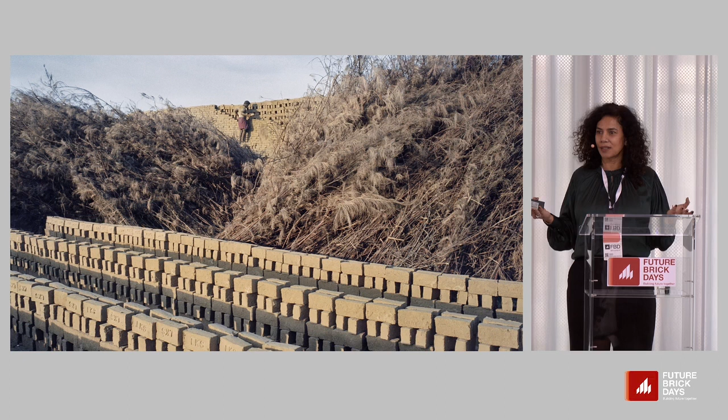So the outer bricks are less cooked, and they are used in the interior of the walls. Instead of getting the entire brick to reach a certain standard of firing, which we have now in post-industrial systems, I feel that over-standardization is probably giving us an environmental problem. I sometimes think about it, because we use a very high-quality thing for everything, which could also be done with a lower quality.

So the lower quality brick, I understood after I started traveling in rural areas in India, is not because they made it badly. It's just that the local clay and the local fuel can only go that far. But it's enough, and it's waterproof. And the kiln, which is composed like that, as a brick stack, is then plastered with the same clay mortar and then fired.

Also, the fuel used is from the thinnings of plantations that they have themselves planted, which we also use for scaffolding, these very quick growing casuarina. But anyway, what I started noticing in the sustainability discussion is that all material sourcing is a socio-economic activity. These people probably fire lime at the same time; there are lime kilns, people making all these materials from what they have around them. But they're also farmers, doing so many other activities, not just an 8-hour job somewhere.

So all the costs, everything collapses if you stop using one local brick. All the other activities get affected. So through that understanding, when I began my early projects, I started favoring locally made bricks, because I found that in South India they were still making bricks of that proportion, 2.5 centimeters high, using lime mortar. I felt you don't have to design what is still functioning. Just design around it and continue what still works.

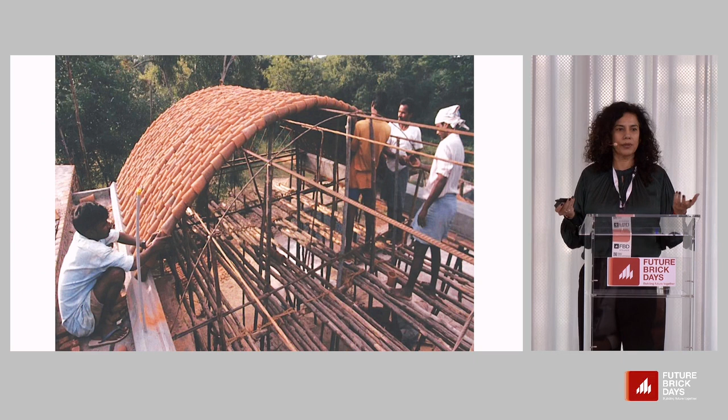If you just see what is around you with new eyes and create materials that would do the place good. And if there's a lot of labor, if there are pottery skills, what you have in abundance, if you build with that, it's going to give a very economic formula. So through this approach, I started my practice at 23, immediately after graduating. And that was the first building for which I had done this kind of roof.

I came, like I said, from Bombay to an area like this. And I felt that if you just repeat the concrete slabs, you would first create a heating problem, then you'll have to cool it with air conditioning. So I was looking for an alternative roofing system, and that's how the journey began. The brick walls came later. So this is an example of that house, where I'm also using lime mortar, stabilized with 10% of cement so that it sets quickly and matches the pace of today's construction.

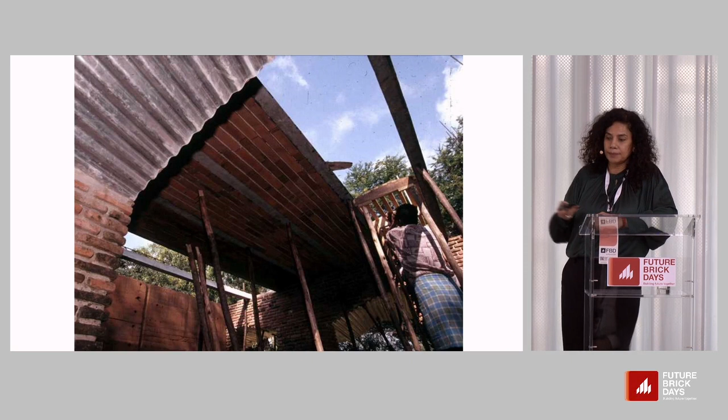But then I went on to produce other roofing systems as the research went along. This is, for example, a jack arch type of system that you can use between prefabricated beams, because you can't use catenary vaults everywhere when you need a ceiling, a floor I mean. And so this is still an insulated final floor that is flat. But then I've also used bricks in a similar way for intermediate floors.

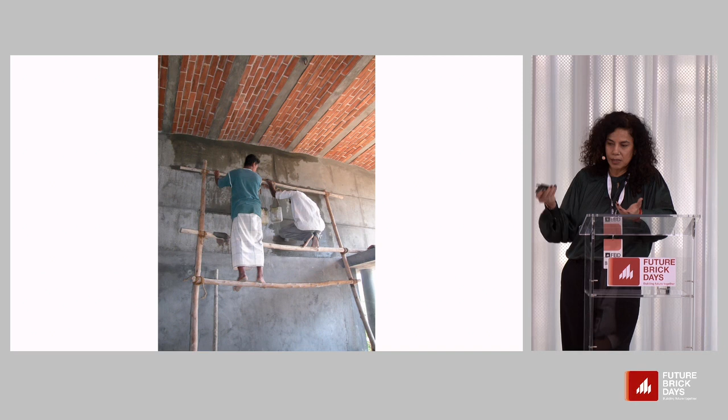While I went along with this, I developed also in that, what I felt is it's an infinity of things you can invent and continue to do. That's why I believe in building the knowledge rather than just building the building. Because if you build knowledge, then you build a community, and with that community you learn, it unfolds into many other expressions. Like here, this is the original ceramic cooking pot that those people there produced, which actually nobody uses anymore on a daily basis, but they still keep producing it for festivals and so on.

I used these materials as a formwork to reduce the steel expenditure in concrete slabs, because a lot of the intelligent concrete applications need complicated formwork, and the formwork becomes expensive. So I made a kind of lost formwork. I know this word in German, verlorene Schalung. I tried so hard to explain that this is not a decorative thing; the idea is that the bigger the span, the more steel you save. Because after a while, concrete has a self-weight problem. So then you can make the whole slab thick, and then you carve out the holes in it.

But then I also started doing brick vaults, and I started using bricks wherever I could initially, because I was in an area where this was the ancient material, and also in places like Berlin, when you see all the main houses, if the plaster breaks, you see there's bricks. So that means that the earth there is good for making bricks out of it.

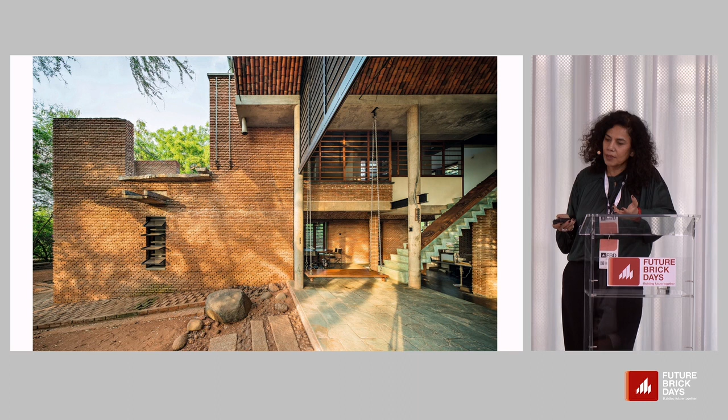Many people feel a brick is just a brick, but I felt that in any material, even in any vernacular technology, there is so much more optimization to be done. We don't have to start with the industrial materials. We can do those, and we can also revisit ancient, timeless materials and probably use them in different ways, or in any case, optimize. So this is the resulting house, which is known as Wall House. It's my own house, actually. That's why I could experiment more.

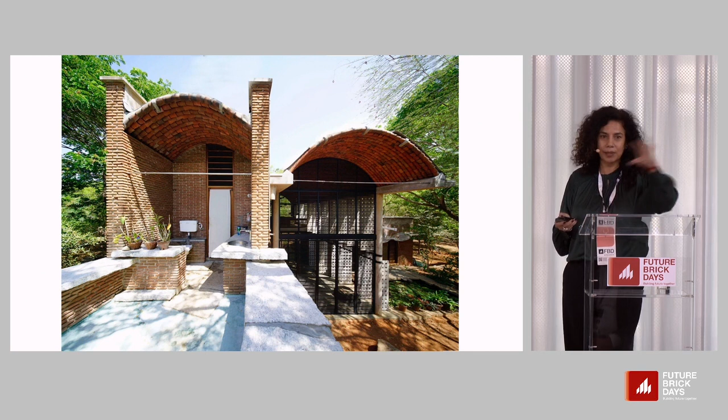I'm focusing on one example where different techniques are there, but you see them piecemeal in many of my projects. And I also used this project to test various ideas so that the clients don't have to feel like they are taking a major risk and being used as guinea pigs. See, the back wall there is rammed earth. When the earth is sandy, I was testing this also for another project. So my house was like a laboratory.

Because I didn't want to make false promises to my clients. I wanted that if they come on board, they should also be willing to take risks, because I don't want to promise some illusion, you know. We have to know where we feel secure and where we are experimenting.

In many of the other low-cost housing projects that I later did, I found that a lot of the techniques I was working on turned out well. My first project was not my own house, it was for a French client who had quite a generous budget. But it turned out in the end that it was also the most affordable one when we did other low-cost housing. So that was a very flattering outcome for me, to see that I couldn't come up with a cheaper roofing system. Even bus sheds have been using them now.

Or this one is a kind of vocational training center for students to learn carpentry, etc. And this system I tested in my house was for this project, which is a co-housing project, so that the roof is like a big insulated umbrella and the intermediate floors don't need insulation. And these elements were extracted on site and produced also on site to some extent.

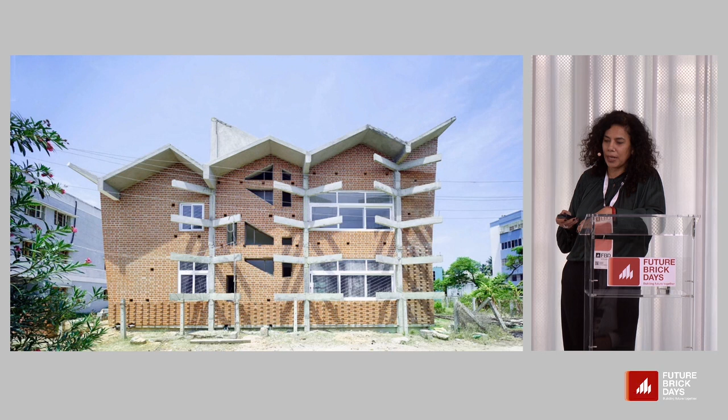And these are very humble budgets, very social buildings. And this is a more recent one, which is a daycare center. In this case, I wanted to make the building look very stable. I wanted to keep it unplastered largely. I wanted it to look like a very stable, solid institutional building, because the children who grow up here come from very difficult backgrounds. And I wanted them to have a sense that we go to a very stable, very solid, permanent building.

And to keep the feeling of the porosity here, even for them, I used the terracotta screens as walls, because this is again a very low budget building, and I preferred to have porous walls and have a very solid roof and a very solid structure, so that they come somewhere and get security.

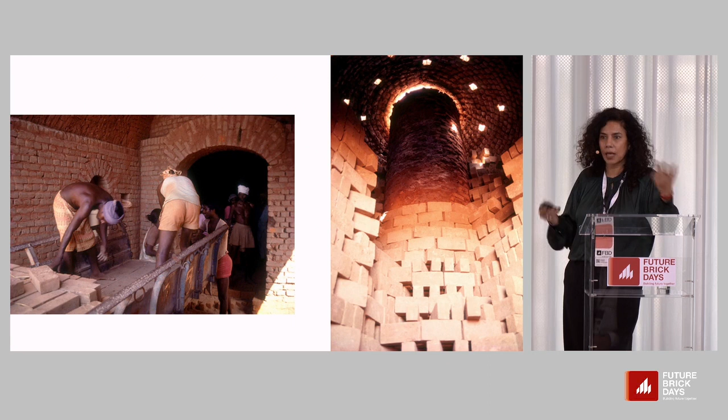It's a very, very complex thing. But for the typical people who make bricks, who know the clay, it's not so hard. It's hard for us in the development phase, and this technology is in its infancy. Because you modularize and produce it on site, but you assemble it with the same clay, you don't need cement. First advantage. Then you get a pattern where the uneven firing is not pixelated. You see it like brush strokes, like how the fire moved, and you can see different colors.

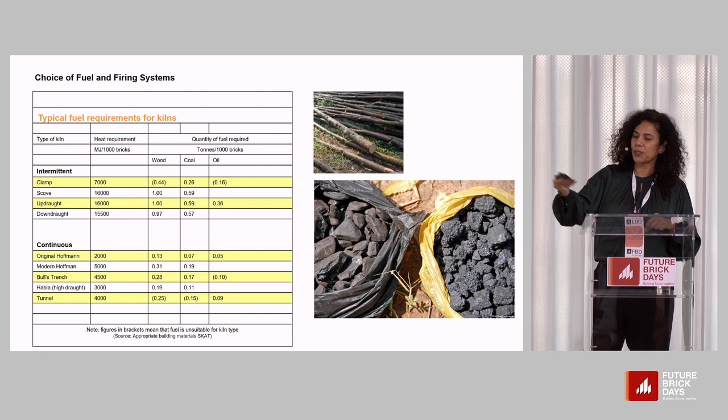But the whole thing is a unified, vitrified product, a large house being produced like a large pot, actually, which is, like I said, theoretically, for the price of a mud house, you're getting the waterproof qualities like a brick house.

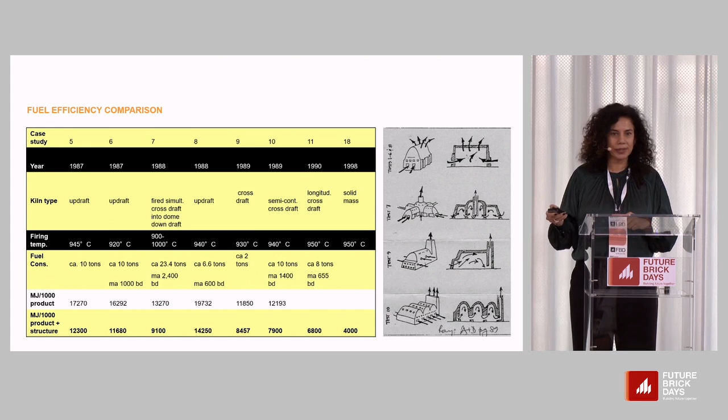And in this system, in my PhD, we had analyzed all types of other kilns and houses: what are the fuel types, what are the types of kilns, and how those kilns could lead to different systems, could lead to different architectures if you were to reuse it, double it up. So this is one of the houses I have designed and built according to those principles.

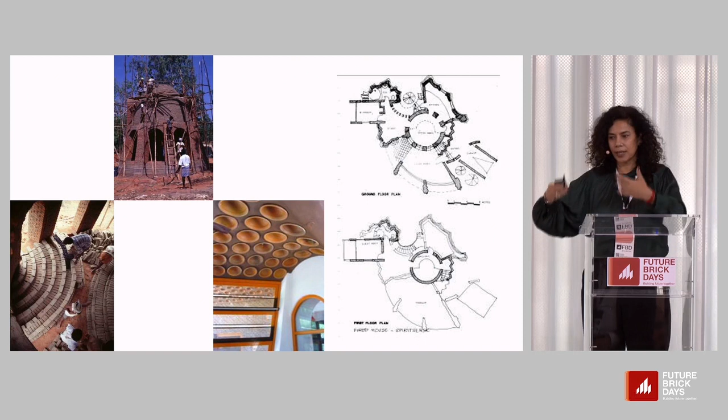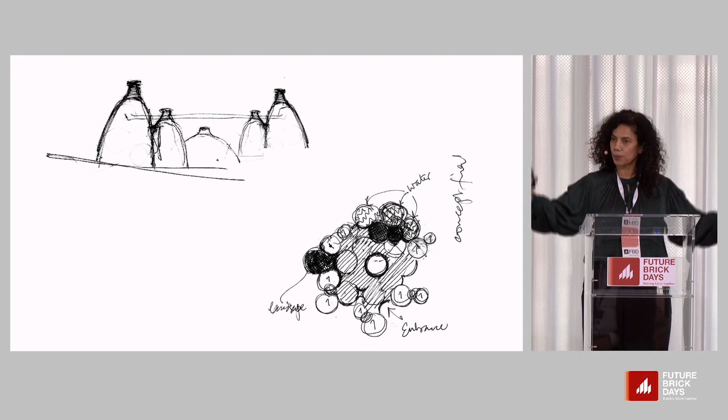But by the end of doing this house, I realized that it's the walls that have to be very thick, and then there's trouble firing the thickness of the wall. So when I analyzed all these structures and did the PhD, by the end of it I thought the best is not to have walls and to do the whole thing like shells. And catenary curves tend to become quite vertical at the base. So instead of having a thick wall like that, just a thin 15 centimeter or 10 is enough.

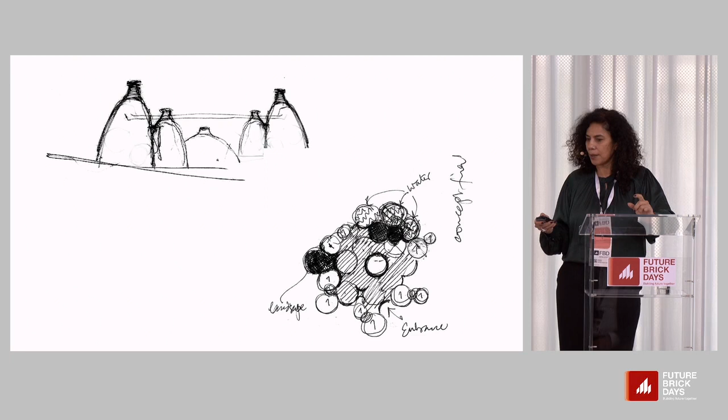So I produced homes for homeless children, which had no budget anyhow, and they were cozy spaces, so I composed all of this on that principle, and I think we might have got quite a high fuel efficiency here, since the whole structure could easily fire through. We used these bicycle wheels, etc., to do the formwork, because we didn't have a budget and we were trying to save wherever we could and reuse other things, even in the process.

One of the interesting things we did here also, I have to mention, is that instead of using wood or coal to fire this building, we took coal dust, which is a product that you can get from all the kilns and all the industries. You can sweep the floors, collect the dust. There is some calorific value left. So Ray Meeker analyzed that if you added 5% of this to the clay and put it in the firing, then by the time the fuel is spent, it is burnt, so the next layers catch fire. Very complicated, sorry if I'm going too much in detail.

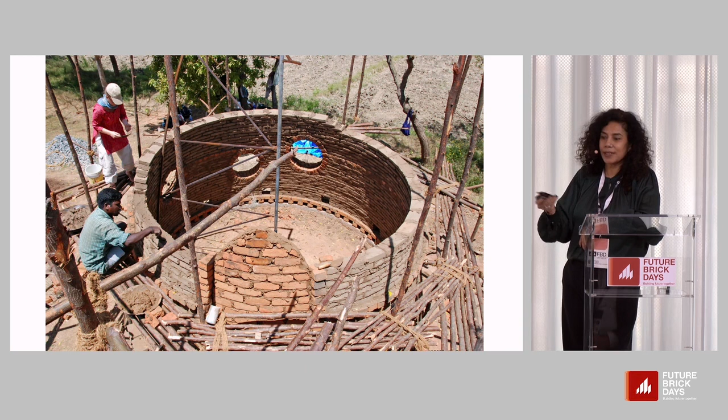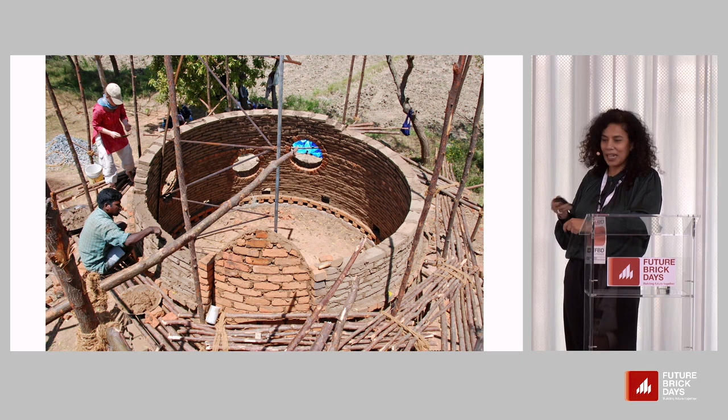But basically, it's another technique because there's also reuse of fuel, and for the efficiency of this, I think we were trying to target being much less. I was telling Ray, it doesn't matter, if you're already saving the waste heat of the other brick kilns, it's already performing well. And he was saying, no, there's no sense in taking all the trouble if you're not radically efficient with the energy, and many layers of rethinking.

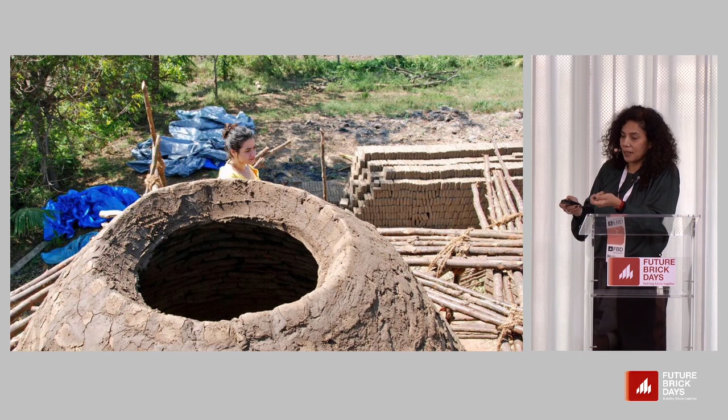So it looks like a humble vernacular project, but I want to show you, see down there, it's full of rethinking. Down there, you see the oxygen has to come in here for combustion, and the other holes are to just start the fire. And then this is how the dome ends, the firebox, as I just explained. Then you have to stack the first layer like you would do a barbecue grill. You have to allow the air to come in from the bottom.

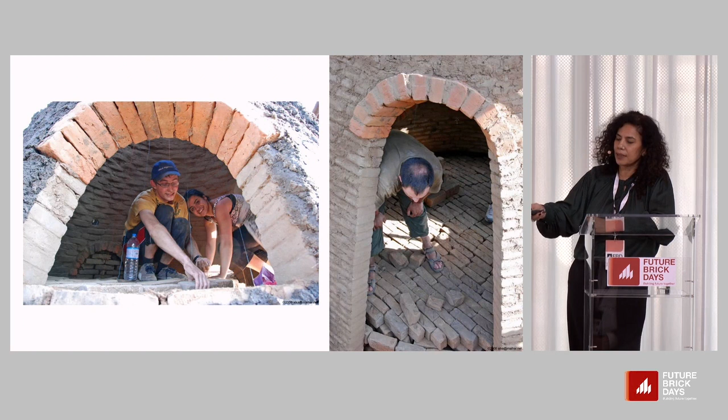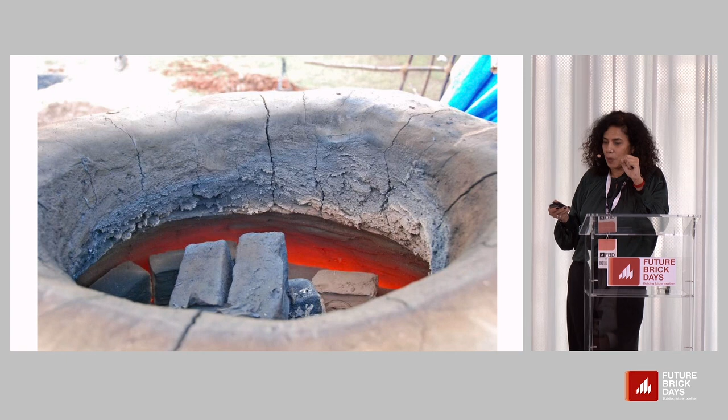So that's also easier. And then the whole mud plaster is applied, and it takes about 3 or 4 days to bake. It also cracks, but it also cools, so it all closes again. And then you harvest all the bricks, and you can finish the structure with it, or you can sell those bricks. And what was interesting for me is that you can manufacture any sizes, you can do whatever you want. See, at the back, there's a wall that looks a bit like lava because it got overburnt in some areas. It's the first experiment.

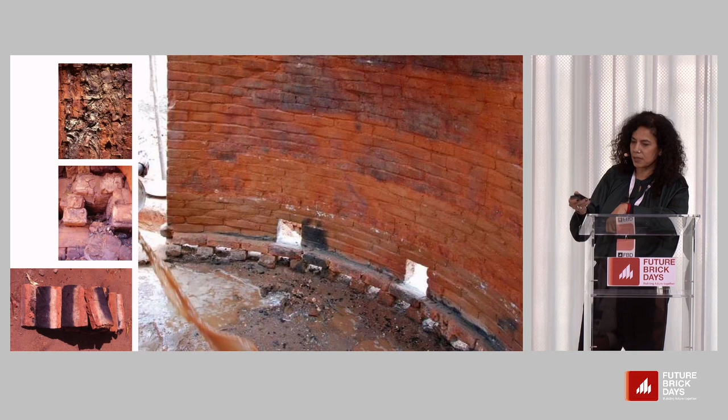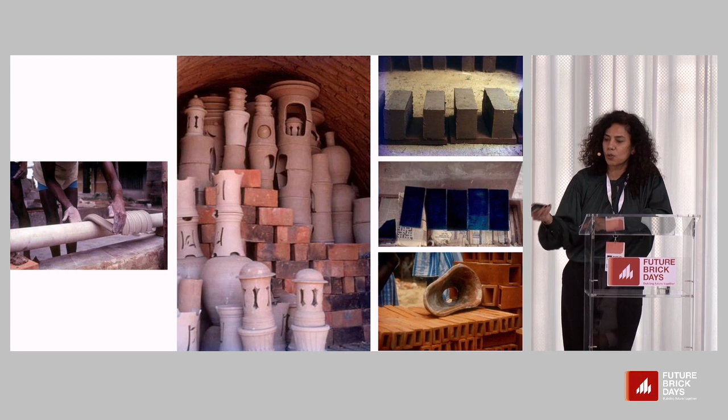And at the same time, this technology has the potential to look at housing as a producer of local building materials rather than a consumer of materials. And therein comes in the local economy and all those aspects. But there's so much ceramic we use, from toilet pans to tiles, furniture, water pipes, gargoyles. And because it's a vitrified technology, I also did the finishing of these domes with broken chai cups and waterproofed them with broken tiles, which are also ceramic but sophisticated.

I will just run you through the fact that... is it time up?

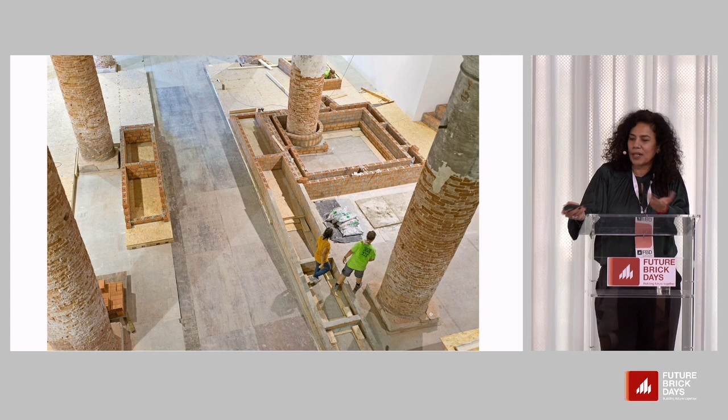Okay, I'm going to end here, but I'll just show you the images of Wall House in 2012 in David Chipperfield's curated Venice Biennale. We had the space to build it one-to-one. It was called Common Ground, and I thought that because Venice is built out of brick, the best is to show the whole time that lapsed and to build this project in full scale, which some of you may have visited.

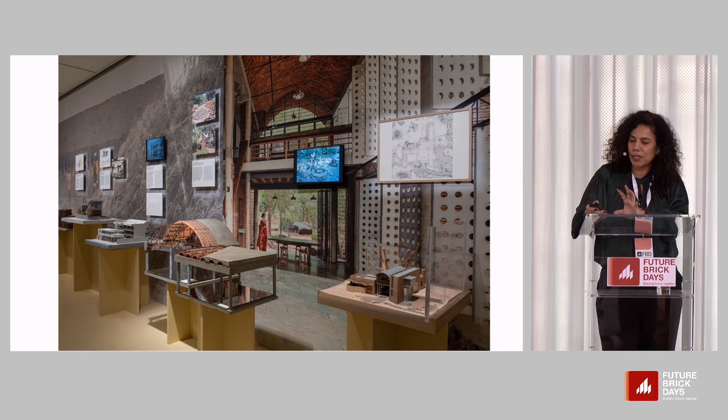And I mentioned just this, Louisiana, that had a solo show of my work called Taking Time. In that exhibition, various materials were shown in depth, but all of these models, apart from spatial models, were in 1:5 scale tectonic models. At the back, you see the homes for homeless children.

Thank you. Sorry for shooting the time. Take this water. Thank you, Anupama, very much for sharing your experiences with us.

Rethink Brick, I think quite an amazing experience, even from a European perspective, quite unusual for us. So I am sure there are a couple of questions.